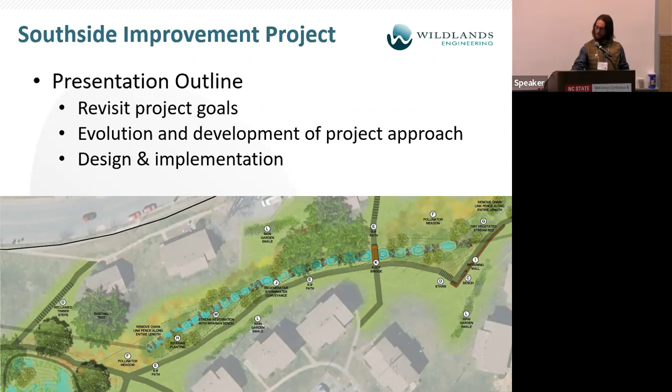I think what I want to do is tell you the story of how this project began as the Erskine Stormwater Project or Stream and Wetland Project and became the Southside Community Improvement Project, because I think the special story here is that journey. And as part of my presentation, I'm going to revisit the project goals that Renee had included in her presentation and talk about the evolution of the project approach, because I think in the end the most interesting part is how this came to fruition, and tell you a little bit about the ongoing design and implementation of the project. So these are the goals.

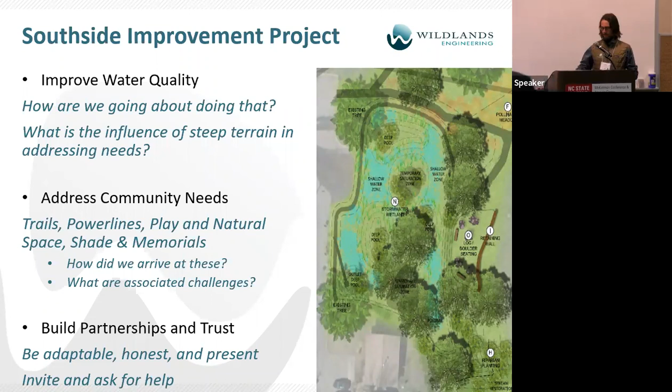As Renee said, these goals permeated throughout the watershed planning process. And in thinking about this presentation, I was trying to tell you a little more about how we are trying to address those goals. I think you'll see some of that throughout the presentation with regards to water quality and community needs. And I definitely saw in the presentation about Walnut Creek yesterday, some of their findings about how they were able to have success with the community, that we're finding a lot of the same things to be true, trying to be adaptable with our methods and with our thoughts about what's possible and what we should be doing out there, and to be listeners and to be present in different settings in the community, whether that's an event that we're not putting on, but we showed up, and that's really provided a lot of opportunity for some organic relationship development that I think's really furthered our project along.

So the Southside is a historically African-American neighborhood that's just east of the French Broad River. A lot of y'all probably are familiar with the adjacent areas that the Southside feels like are crowding them a little bit, which is the River Arts District and the South Slope. And those are places where there's a lot of development for tourism. And the Southside name is really important to the community there. They approached us early on about renaming our project as the Southside Community Stormwater Improvement Project. That's a way for them to help promote and preserve the culture of their neighborhood. And we were happy to do that.

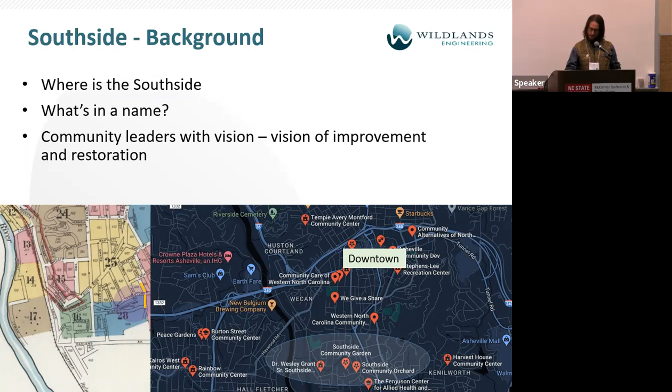And I think it's been a nice thing to be able to do that and really give the community the opportunity to adopt that project as their own through the name as well as through the other components of the project. We've had some great community leaders, a fellow named Roy. We have a conference call with him every couple weeks, and he provides us inspirational stories about birds and plants and what he saw last time it rained. And so I think having those folks from the community that are invested in the project has been a real benefit as well.

So the evolution of this project started during the watershed planning phase. That's the Central Asheville Watershed Plan, which identified the Erskine Apartments as a great opportunity for both environmental and social benefits. We rented e-bikes and rode around the watershed one day, which is a great thing to do if you go to Asheville. The Flying Bike, that's where we got the e-bikes from, and they're in the watershed.

And this property is entirely owned by the Asheville Housing Authority. And so not only did we see some benefits for the community, but also for the landowner, which those of you involved in making projects happen know, it helps to be able to put something in front of the landowner that benefits them on their other fronts. And so this housing development was built in around 1969. A lot of the original infrastructure is still in place, and addressing some of the infrastructure concerns as well as some of the resident concerns were things that benefit the housing authority.

So it was the vision of Marshall and Renee, I think, that led us through what's been a really effective stepwise process on this project. And after being initially identified in the watershed plan as kind of a simple concept of here we've got this wetland leaking onto the street and causing health and safety issues, and we've got these concrete ditches and things that are cracking and falling apart, Marshall's recommendation for us to go forward with the basis of design report provided a really good transition phase, which I've often seen lacking from projects, that helped take this project from just an idea to something that we could go pursue grant funding for.

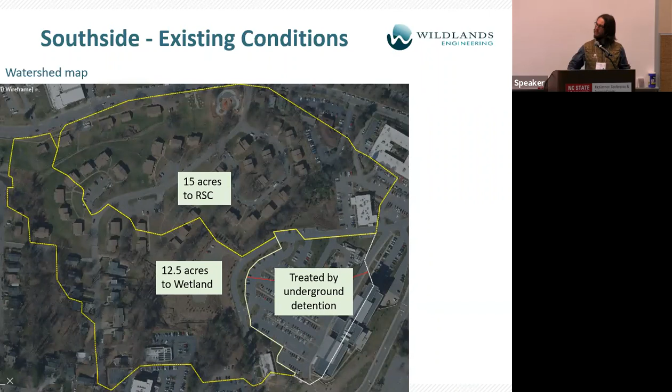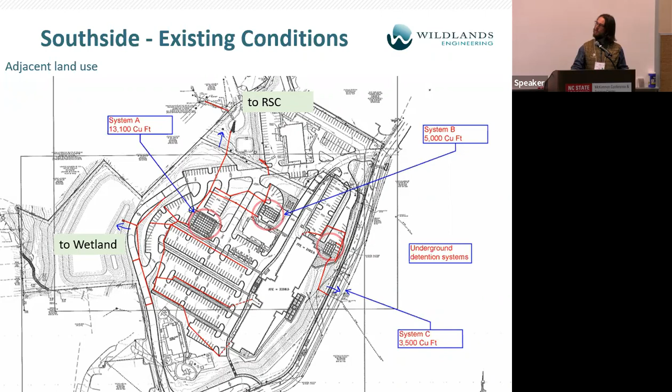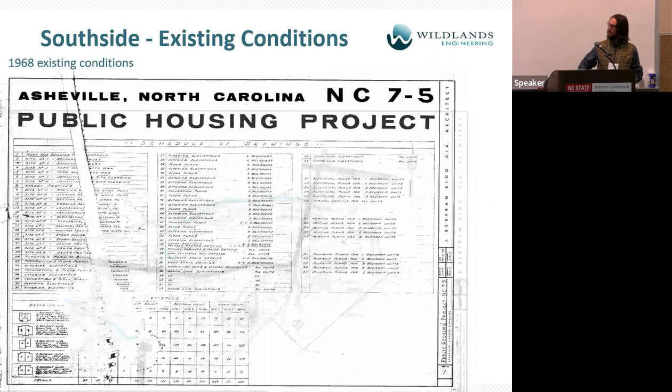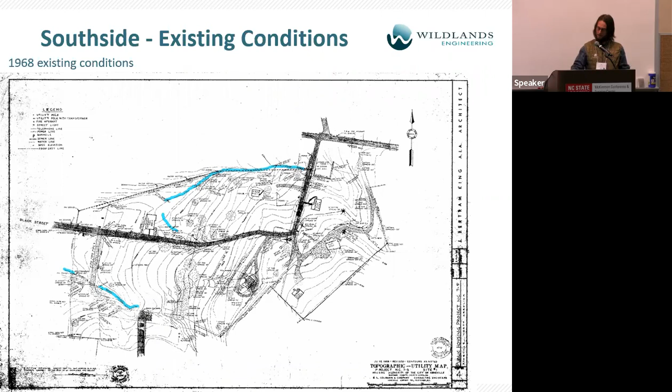So here's some plans we were able to track down, as-built plans for the work high up in the watershed, to better understand the treatment higher in the watershed. The Housing Authority was able to provide the 1968 drawings, which had some interesting information, including a bunch of very relevant utility information that is consistent with what we've been finding out there, and some existing conditions, the mapping of the original topography and vegetation on the site. So there's some good information to be had out there when you're looking into projects like this.

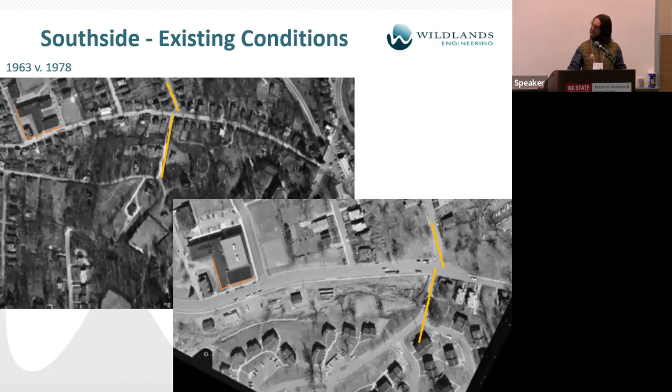People would come into the depot down on Depot Street in the Glen Rock area, and then they would spread out into this business district where there were jazz clubs and other places. And there's over 300 businesses that were demolished as part of this urban renewal process. And so that had a huge impact on this community. And I think we're kind of excited to be able to try to do something positive with this project.

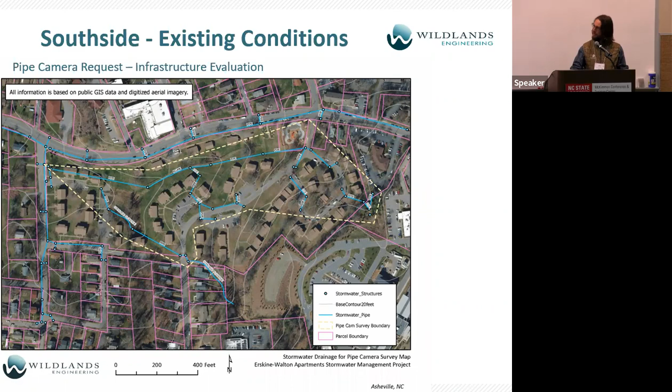So a lot of the existing infrastructure, as I mentioned, is still in place. So it's been about 50 years now that these concrete channels and pipes have been in place. And we got the city to agree to do some camera work on these lines. They surveyed all the pipes here shown in blue. As probably one would expect, those turned up a lot of broken pipes that were rusting, and blind junction boxes that may kind of make our job a little harder to figure out what's at what elevation.

And so we're moving forward with that information, as well as these other existing conditions. There's a lot of on-street parking and a lot of parking in general. So car fluids and other things of that nature are concerns for water quality. You've got these headwater drainages that have been converted to concrete channels. And so the idea of trying to renaturalize those channels and also address the fact that that infrastructure is deteriorating and will need to be replaced.

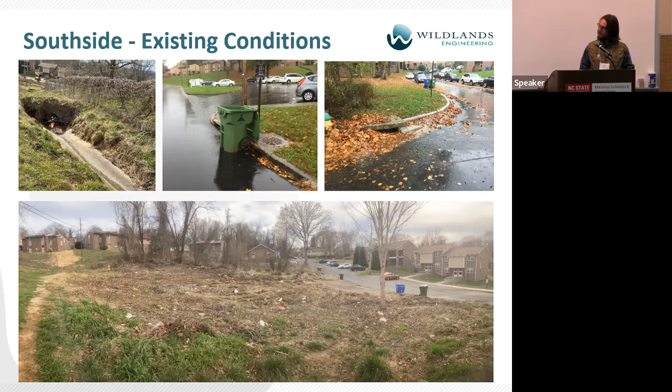And then in the lower part of this picture, you can see the existing natural wetland. This is the one that was oozing onto the street, and it's also overgrown with invasive species. There's some major trash problems on the site, which is slightly more difficult and a challenge in and of its own. But the other social opportunities that we identified at the site were aesthetic opportunities, such as removing this fence, which no longer serves its original purpose.

We saw a ton of common use trails that we felt like providing folks a way to get from point A to point B on a more constructed trail system would be a wonderful thing for the community, connecting them up to their community center up on the road with some staircases and trails. And we found some overhead power lines that probably most of us would be appalled if this was in our backyard, where our kids were playing, a 7-foot tall power line running through there. So we're looking to relocate and raise that.

And we also heard some input from the community about the importance of this green space here in the lower right. And that was us when we set up with Asheville on Bikes a nice mobile bike park, which is a really cool thing. Had bike jumps, and they brought some bikes out there and the kids rode around on those. And this open play area was an area that initially we thought, well, this is a great spot to put a stormwater feature, but it's also a really important feature for the community. And so that was some of the feedback we heard back.

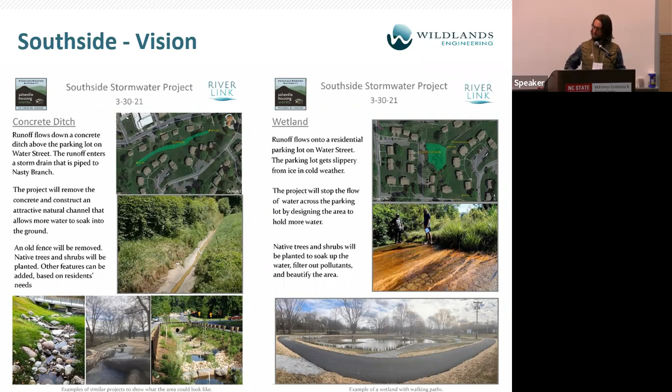So these were the two concepts, as Renee showed, the original concepts of replacing the concrete ditch with the regenerative stormwater conveyance and addressing these issues down at the wetland. And as part of the vision for the project, we were able to incorporate a lot of these features and kind of integrate them into this linear regenerative stormwater conveyance corridor through these trail projects. And there you see the wetland down at the bottom of the screen. Up on Livingston Street, that's the community center across the way. And you can see we're trying to connect these trails into the existing sidewalks that go up to the buildings.

We're also looking for opportunities to disconnect these buildings through GSI practices to smaller rain gardens and bioretention basins. And then the RSC, that's more of dealing with the regionalized 15-acre watershed runoff, whereas the GSI projects are dealing with that localized runoff from small parking lots and buildings.

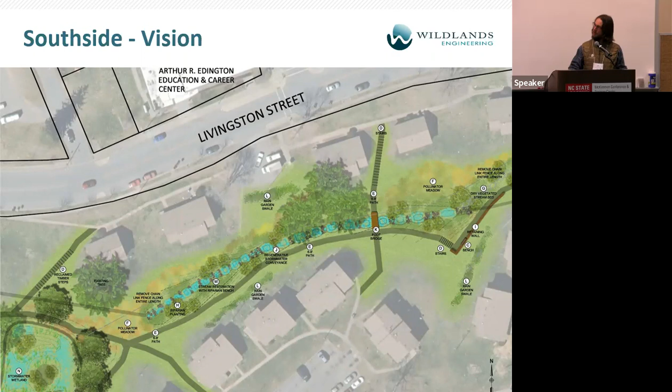Some of the community input that we got, it surprised me a little bit at first, but it makes a lot of sense, was an interest in who's going to maintain these long-term, some kind of recognition that people come into the neighborhood and do things, and there's not a great plan of how to make these things last. That also relates back to the original design and what are we building these out of, and how robust and resilient are the implementation features. Desire for a memorial space.

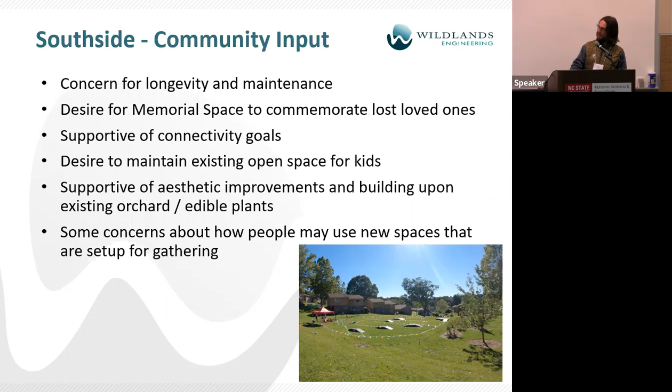Renee went through a lot of these, so I'll kind of breeze through these, but we heard a lot of great information about some of the concerns, but also some of the interests that folks had with the space that we were developing, and that set us up to be able to pursue funding with the support of the community for these projects. So we're currently working on the design phase of this project and planning to bid the project in about a month.

I've mentioned a lot of the existing conditions work we did. We also looked at hydrologic evaluation of the flows coming out of these watersheds. We put a pressure transducer in the wetland just to try to validate the rainfall runoff relationships that we saw coming through that wetland feature.

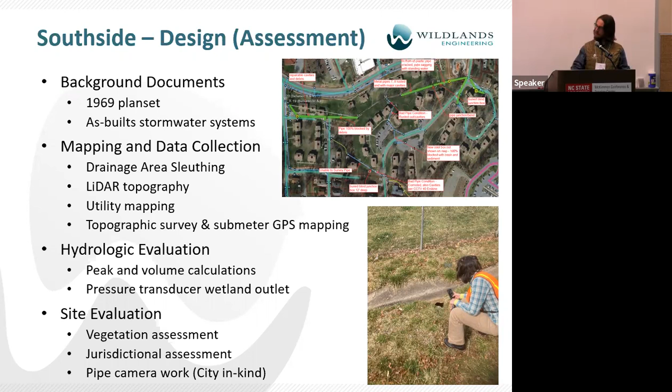And Wildlands has an adaptive management team; we do a lot of mitigation projects where we keep up with them for 7 years and do vegetation management and things of that nature. And they've looked at this project and given us some advice about some pre-construction treatment of vegetation and also long-term management of invasives. We did the typical jurisdictional things required for permitting, and this is our list of site features that we're implementing.

I think Renee's talked about some of these, the shade sail and Memorial Plaza. Those were amenities that were desired by the community. We're also installing a French drain down where there'd been some digging around down there by the wetland area to try to address the safety issues on the street. And that's been partially effective, but water still seeps out of that pavement. And so part of that is trying to address one of those initial issues that brought us to the site, which was the aesthetic and safety issues and the smell of all that water seeping out onto the pavement.

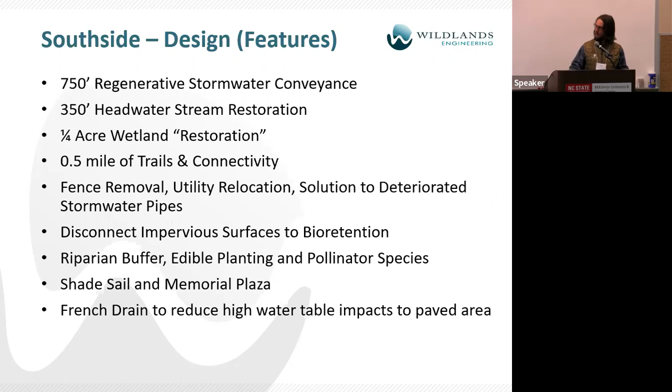So these were character images that we provided along with the concept rendering to the community to give them a better visualization of the things that we had proposed stormwater-wise and the things we had heard from them amenity-wise.

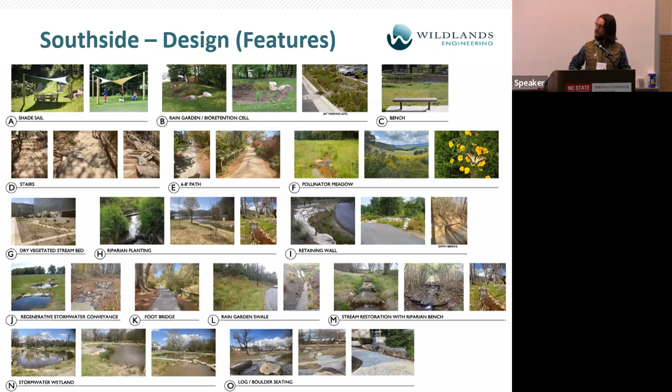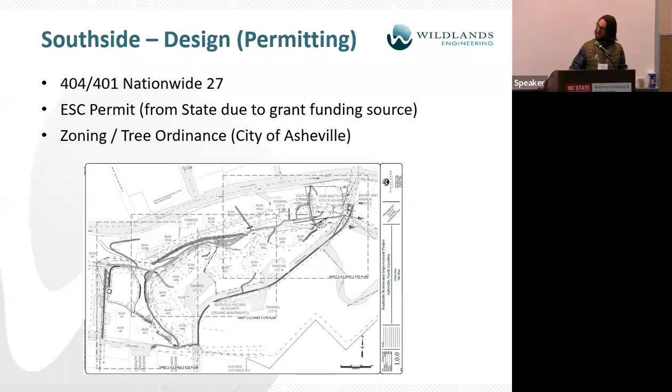We're pursuing a Nationwide 27 restoration permit for the wetland work. We're going to be doing some recontouring in there and making that provide some stormwater benefits as well. And the way that they're able to permit that work is because of the existing condition being so deteriorated. It's got sedimentation, invasive species. And so by being able to show a functional uplift in that wetland, we're also able to integrate some stormwater benefits into that. That's probably kind of an atypical situation, but something that may come up in urban settings more often than in a more natural or less disturbed setting.

We've had a number of ongoing discussions with Green Opportunities, which is a green jobs training outfit that's right across the street from this project, and are trying to figure out the ins and outs of how to integrate them into different components of the project. Getting these trainees between 16 and 24 years old out on a construction site, working on implementing trails, erosion control, stormwater features, learning some about surveying. And so we're trying to figure out how to make this a valuable opportunity to them so they can go off and work in this sector of stormwater management if they take a passion for that.

We've had a lot of great partners, not listed on this, but very significantly the Residents Council of the Housing Authority, as well as Roy, that's been a champion for the project. And I think that's a critical thing for projects of this nature, is to have those community members that just take a personal interest and are champions of that.

I think some of the things that we're working on that we feel like will be challenges, but ones that we're up to, are bidding the project. And I think the challenge of how to integrate the job training opportunities under the purview of a contractor. For quite a while, we're trying to set this up to have someone specifically be a liaison between the contractor and the job trainees. And that person's moving to Colorado, but we're working on a new solution for that. But I think that's something that we're working towards, what are the things that we need to do to make this happen and come to fruition.

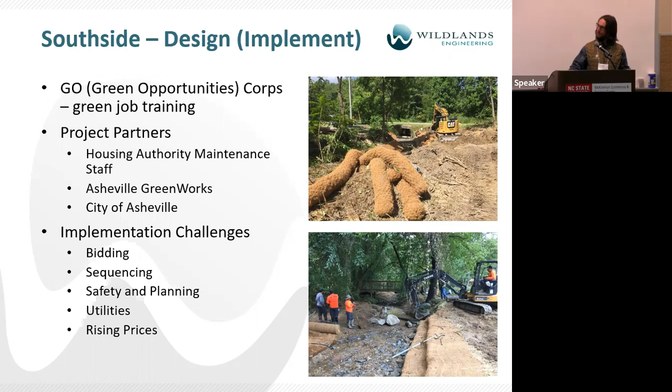Also, given the setting, some of the sequencing and safety planning and how to deal with the gas lines that are running here, there, and everywhere, and all the other utilities in the complex are all challenges that hopefully next year I'll come tell you how we figured those all out. And that's the end of my presentation.

Thank you, Jake. We're going to move right on to the next presenter, but there'll be ample opportunity to ask Jake and all the presenters questions from the previous session and this one. Our next presenter is Mary Roderick with Land of Sky Council of Governments, and she's going to talk about what we have begun to call preserving and restoring a gem.

Yes. So thank y'all for sticking with us. I know it is the end of the day, but this is a really cool project too. And it's a component of this much larger watershed planning process that you've been hearing about. Luckily, Renee did get that creek named through that process, because now we can call this project the Haith Branch Watershed. Otherwise, it would be the unnamed stream.

So we did this work, and I'll just continue through the Greening America's Communities program. That is something through the EPA. It started out as something in the state capitals. They expanded it to all communities. And they have worked with 39 communities in the last 10 years.

So that was through 2020. We're not in that number, so they've worked with a few more. And what they do is provide green infrastructure design assistance. And we were selected for that program because of our participation in another program called Building Blocks for Regional Resilience.

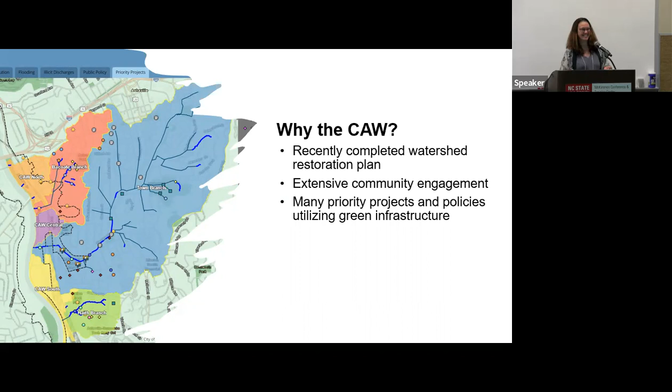I knew that the EPA expected to do a planning process, and I didn't want to do a superficial process. I knew that this process had already been in place, that had been over a year long. There had been extensive community outreach, and there were a lot of great priority projects that focused on green infrastructure in the plan. So I reached out to Renee and said, hey, do you want to receive this design assistance? And she's like, well, yeah. Luckily.

So the partners, again, I've mentioned the EPA. The EPA hired 2 firms, one actually based here in Raleigh, Biohabitats, and Spackman Mossop Michaels. The office we worked with was based in New Orleans. They worked on all 4 projects nationwide. Ideally, we would have been hiring locally, in my opinion. We have some fantastic designers and engineers in our region, but it was a great collaboration, and I think they did a really good job.

We partnered with AB Tech. Jake mentioned part of the campus that's above the Southside community. We worked on another portion of the campus. We partnered with them on these projects, and I'll talk more about what projects those were. And of course, Riverlink as the leader of the watershed planning process. And our process did follow that bottom graphic, the initial design, the charrette, community feedback, revisions, and final report, even though we were doing it all remotely.

I want to go into that virtual meeting structure just a little more. It was a 3-day process. Normally they do it in person, and it's very much tabletops and sticky notes and big pictures, the common community engagement process that if you've done this design work, you're familiar with, but we had to do it all virtually. They did come do an informal site visit. It wasn't EPA sanctioned, but they wanted to come anyway. So that's a good thing about being in Asheville, right?

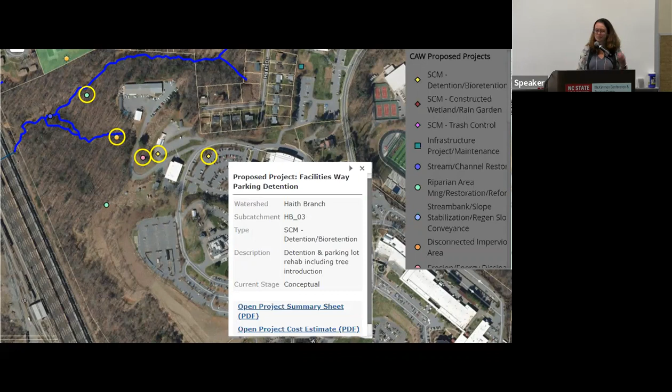They came in and did a wonderful site plan, starting out sites 1A and 1B, the purple, starting at the top of the parking lot. And that's southwest of the AB Tech site that Jake mentioned. And then sites 2A and 2B and site 3. So I'm going to talk about all these briefly, mainly just to highlight their relationships and the co-benefits that we were able to also integrate into the design process.

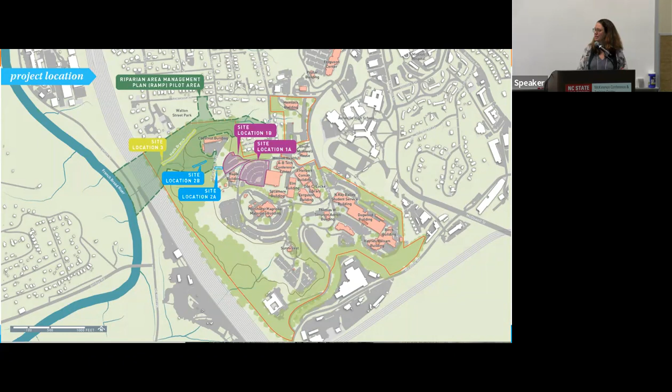So existing conditions, all pretty standard parking lots. Site 1B is an underutilized parking lot, mainly used for storage right now. The design basically was to take a lot of parking out, put in some picnic tables because it's a commuter campus. A lot of people are eating in their cars. There's a vignette of that in a moment. The lower lot is completely removed and turned into lawn and terrace seating.

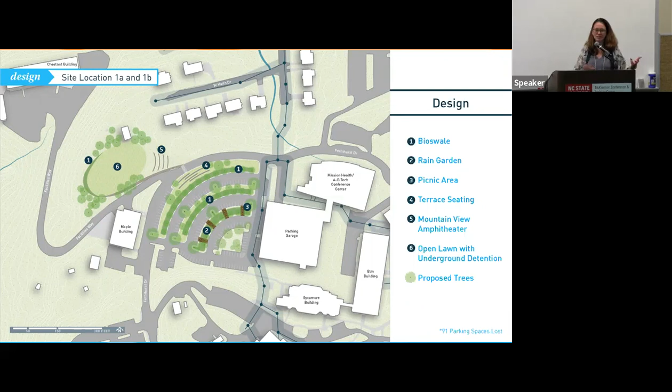So Tim is a big fan of terracing. I wish he was here. But the terracing also serves to slow and manage stormwater. But on a campus, an amphitheater is a wonderful asset to have. So, at each time looking at how the stormwater management can also be a community amenity, in this case, the campus community amenity.

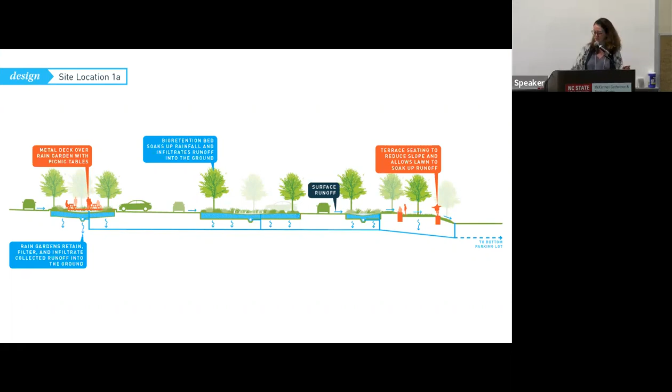So the section, I just want to show this briefly because when you visualize it in section view, the current design is, runoff goes into the inlets and it's piped underneath the parking lots and does not run off into the beds in between because they're mounded, right? And instead, really taking them out, allowing the rainwater to go in, turning those into cool picnic areas. So that was the section view for those upper sites. And that's a vignette. And I would love to see that happen. So fingers crossed. I'll talk about that in a minute.

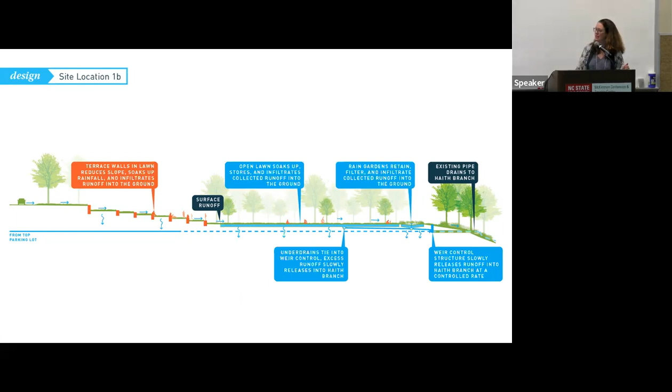Moving on to the lower site, all that stormwater from the top, there's overland flow, but it's also being piped underneath, and then down to Haith Branch, and we'll see what's happening because of that. It's pretty brutal. They suggested slowing it with the terracing. There's also a weir control structure envisioned at the end, using that lawn to soak up more stormwater, another rain garden at the end. So I think a really nice change. And of course, if that became reality, it'd be way better than it was before, right? And a nice campus space. It's a commuter campus, and there's not a lot of campus spaces.

HCC, the community college in Haywood County, is much more campusy, and it's really wonderful. And that kept playing in my mind too, and how I wanted to get the team out there, but I think we chose to meet at New Belgium instead or something. I mean, like beer or another community college campus visit.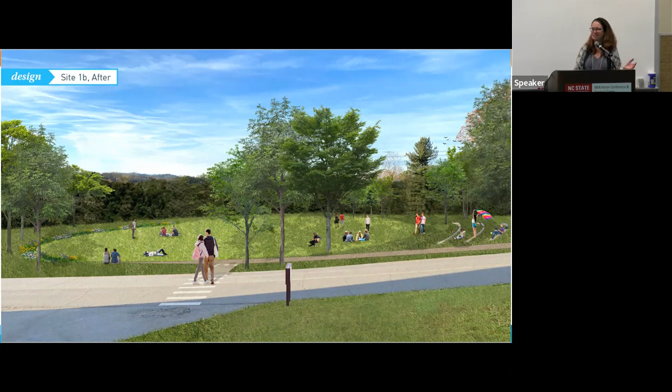I don't know. Anyway. So another big component of this, which I really liked, was the Riparian Area Management Plan. That was a policy recommendation. And the design team did not engage with the policy level aspect of right-of-way coordination. We did not get them into that, trying to work across city departments and the county and who's doing what, when, and where. That still needs to be done, and I think is an important part of the recommendations from the watershed planning process. What the design team did is just visualize some of the practices that were suggested. So the regenerative stormwater conveyance and the stream bank stabilization.

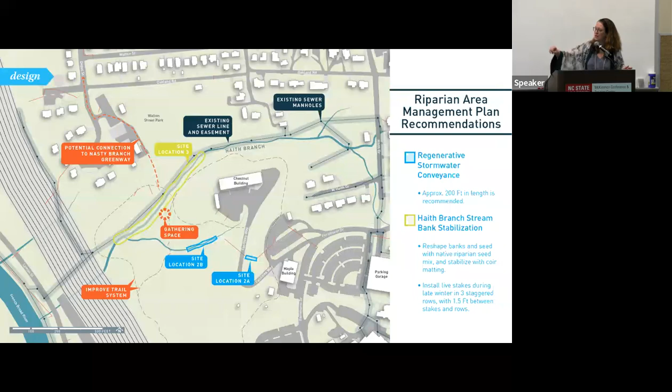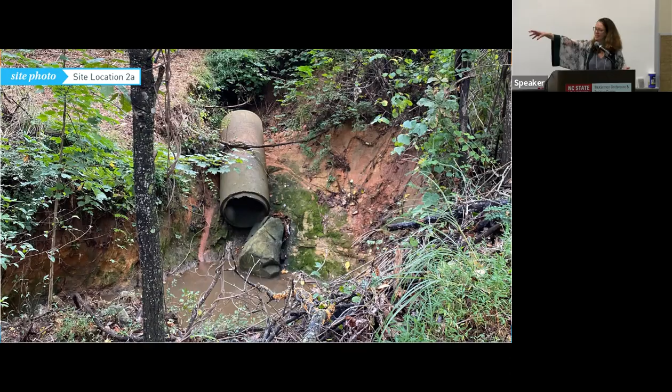So we're moving down from the parking lots now to the blue sites. This is where that stormwater from those parking lots is coming off into what Renee calls the erosional gully. This is a small tributary to the Haith Branch. And continuing on, you can see it really is an erosional gully. It's a big mess. And I mean, that's a lot of erosion. Kevin's there for scale. So of course, managing that stormwater on the upper parking lot is critical. And then doing the restoration work here.

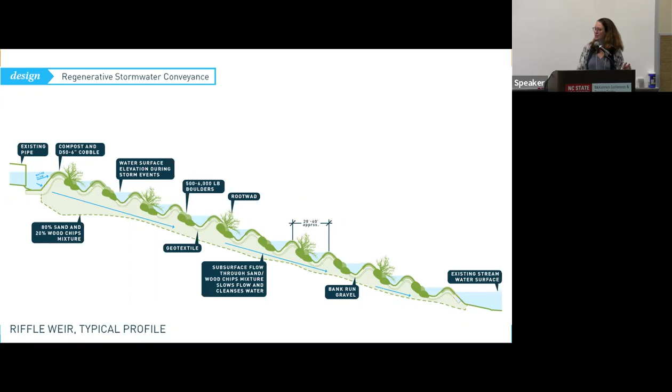And then finally, the stream bank stabilization. This is pretty standard. They added some deer to the picture, and it turns out there are deer wandering around out there. One thing that you're not seeing is a gathering space that they had also envisioned. There is a trail. There's a sign now describing the Haith Branch that RiverLink has installed, but that's a classroom space too. So, how can you make that more functional for a classroom? And I hate that that section does not have that in there, but that was another component.

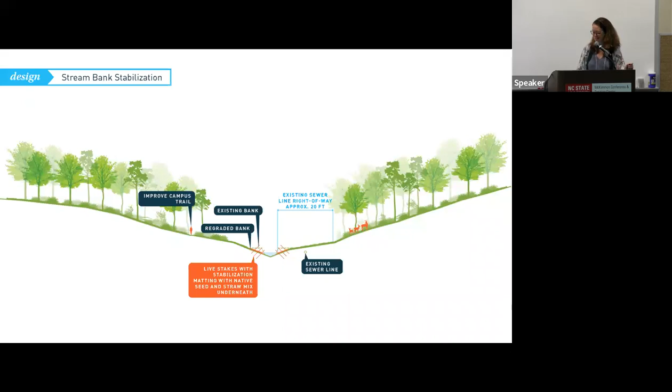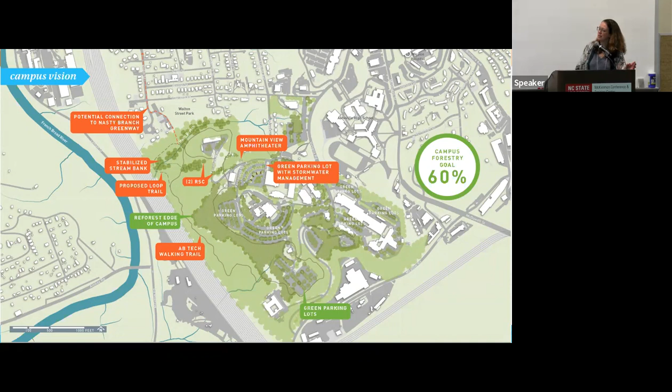So this was the kind of finished total plan. I did not touch on the reforestation. They did suggest, that's the dark green, at least a 20% reforestation. I mean, the campus is pretty forested compared to the rest of the city, but they saw potential to add another 20% trees to reach a 60% forestry goal, because of course that's also helpful with stormwater management. But you see the Mountain View Amphitheater and the loop trail. So there's that trail, but the potential to connect that trail out to the Nasty Branch Greenway and into the communities adjacent to the campus. That was another thing that we talked about and that we were interested in doing.

So from the public meetings, from the stakeholder meetings, there was really a universal agreement around the goals of the project. People got it. They understood it. They wanted to see that stormwater management happening. They wanted to see those amenities. They certainly want to see that restoration work being done. They were fine with removing parking, which the design team was shocked. All right, like that never happens.

But AB Tech had built a giant parking structure right next to those parking lots. So those parking lots are underutilized as it is. So that was part of meeting with the campus, like the president, at the beginning, before saying, "Oh, we're going to remove all your parking," to just make sure they're okay with promoting that idea. Don't want to make any enemies right at the beginning of a project. So they were on board with that. And people like the regenerative stormwater conveyance.

They understood it and really liked the idea of connecting to the communities, because that's always a discussion of, are we this insular isolated thing, or are we part of the community? And the overarching resonating statement from folks on the campus was, we're part of this community. We want to invite the community in. They can use the trail system. Like, that's a good thing. And we had that feedback from community members as well, that they were interested in having that access and having that open door, right? That's just not a conversation that's happening right now. So, by really strengthening that trail system and signage and saying, hey, use this, that creates a different dynamic.